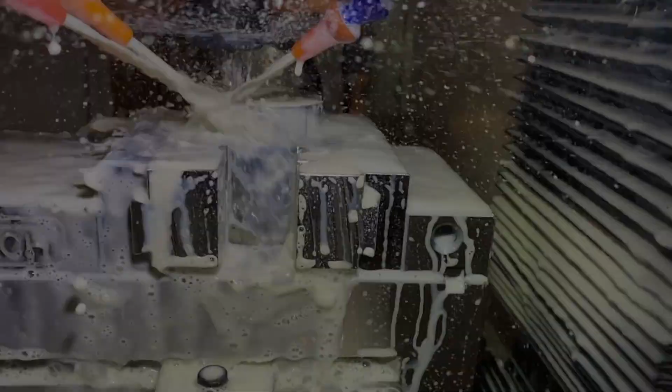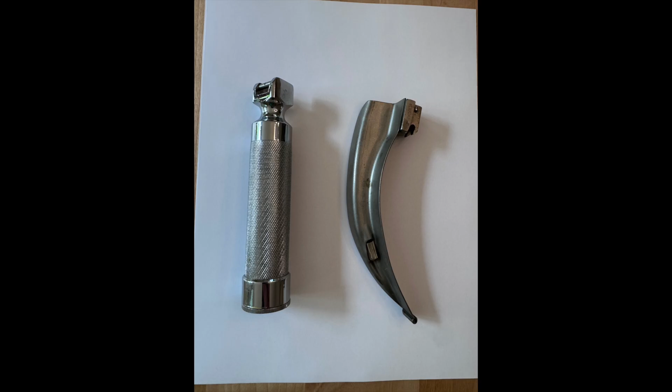Hey, it's MakerDoc here with a quick tutorial on how to make tool trays for all of your medical devices. Now, this isn't the only way to do it, but it's a really simple way. So we're going to make a tray for this laryngoscope handle and Mac 4 blade.

So the first thing we need to do right here is get the special measuring device that we scan it with, which is a piece of paper. Depending where you are on the planet, you can use US letter or A4 paper. And the reason we use that is twofold. One, white background makes shadows stand out really nicely. And two, lets us have an exact size background that the tool can use to trace.

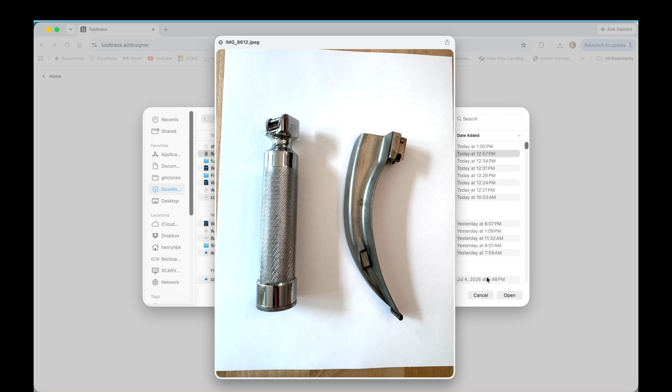So after we've taken a photo, I'd suggest you get it as perfectly up and down as possible. You can be a little skewed as you see here. You're going to go to tooltrace.ai, and it's going to take your photo, it's going to trace it, and then on the left here, you're going to select your options, so millimeters or inches, and how much of an outline you want, like an offset.

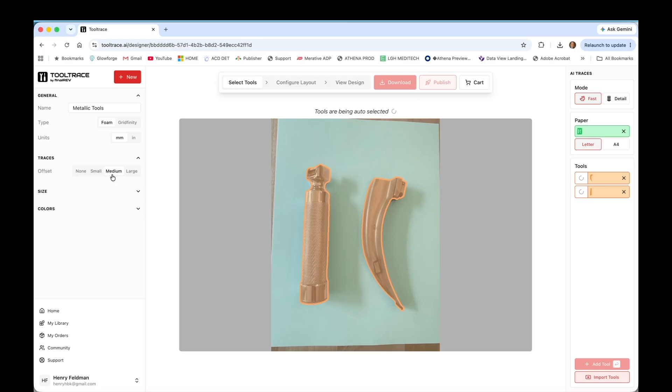And this matters if you're printing it in hard plastic or something like TPU foam. And then how deep you want this. Obviously for things like hemostats, you only want this a few millimeters deep. You don't want your hemostat down in a hole. A laryngoscope's a pretty thick object, so I left it at the default of 20 millimeters.

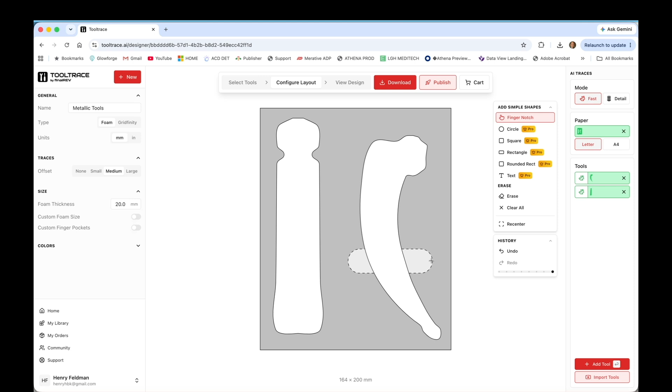Now you're going to see your design that it's traced out for you, and you probably want to add some finger holes, which luckily there's a built-in tool to do. And you can see what happens when you do that. I'm going to add one for both the handle and the blade. When you're all set for how you like it, you can view the design in 3D and you can get a good sense of what it is.

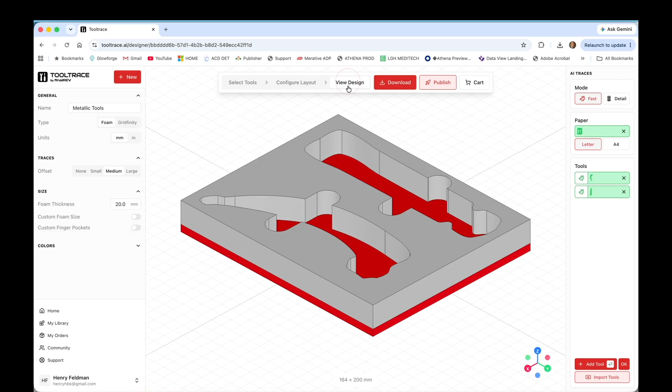But we're not done yet because that's just a foam insert. Or it doesn't have to be foam, but essentially that's what it's making. So now we're going to make a case using this. So let's hop over to CAD, and we're going to export it in what's called STEP format, which is the sort of universal CAD interchange, and pretty much any serious CAD program knows how to use this.

A few moments later. Okay, so here we have the model we just generated in CAD. And there are a few mods I want to quickly make. You'll notice it's actually two parts, and that's because we selected foam, which is called Kaizen foam, which is a two color foam. And the idea is that your tools obviously show in color. And you can print this way, right? So if you wanted to print the bottom in red PLA and the top in blue PLA, that works fine.

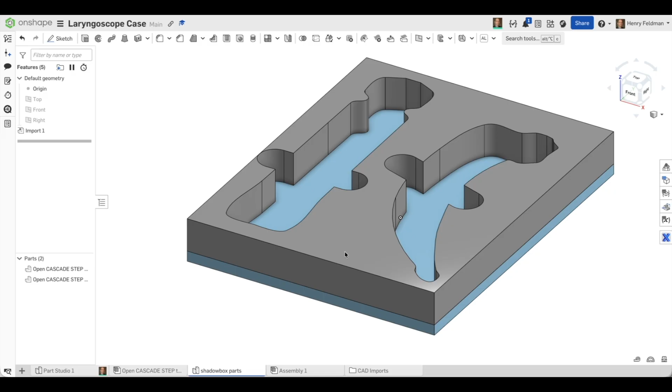The colors here are just the default colors in Onshape CAD, which the first object is blue, the second one is gray. You can set them to whatever you want. Anyway, so the first thing I always do, so a hard edge like this, even if we're making this in foam, has a tendency to tear. And if we were doing this in metal, for instance, that would have a high risk of chipping and obviously cutting things. So generally you want to put some sort of smooth edge, and you can do either fillet, which is a rounded edge, or chamfer, which is a 45 degree. We're just going to do chamfer because it's quick.

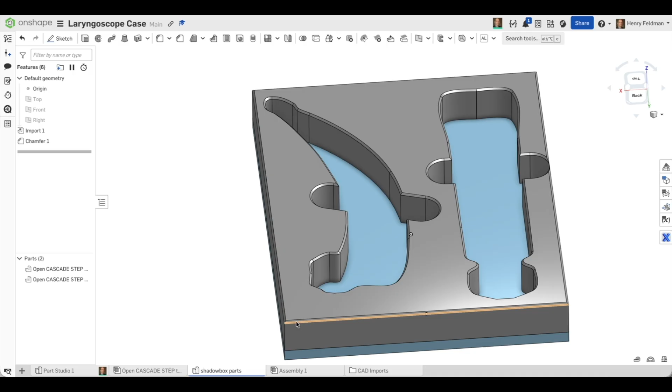So you can individually click on all of these outlines, or you can cheat and say, you know what, I'm just going to do the whole box. So if I do that and we say chamfer, we'll do a 1 millimeter chamfer. Fine. Now the edge is broken. Now you notice it did actually do the edge, but whatever. You can remove that later if you really desire. Anyway, you'll notice that's got a nice little broken edge so that when we print this, it won't be sharp, and the tools will slide in and out easier.

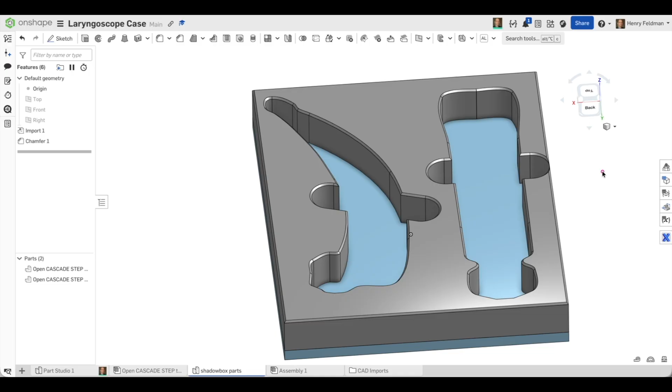So we can see that we have a rectangular box, we have sharp edges, and this is what I was talking about. If we print this, you're not going to want to touch that in the OR. Those corners would be absolutely sharp, even with this little chamfer on the edge.

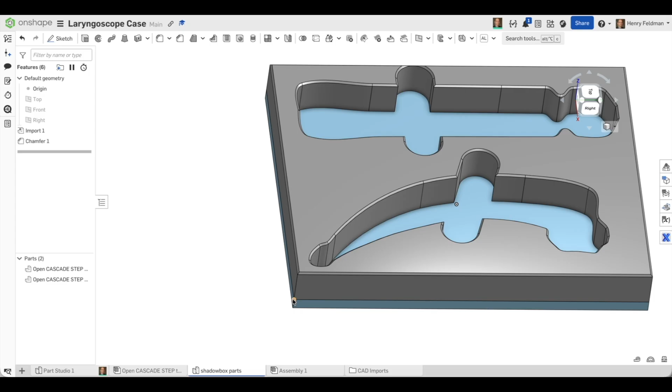So if you were just going to print this as is, I would suggest you chamfer or fillet those edges just to make them less dangerous. But I want to make a case around this. So the cool thing is, one of the things you quickly learn in CAD is, unlike what your mother told you, you need to draw on the walls. So we're going to draw on this surface, and we're going to make a sketch, and we're just going to make a box. And so we're going to put a thing around this.

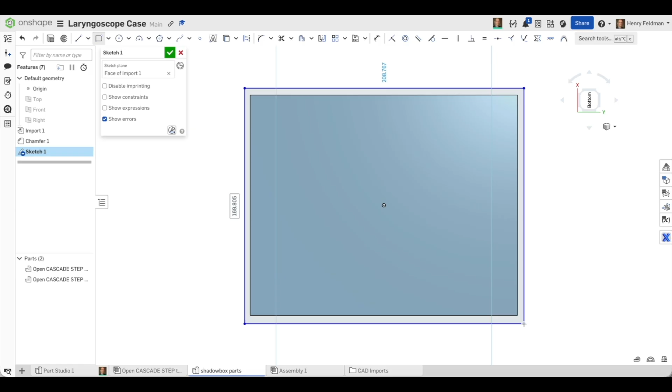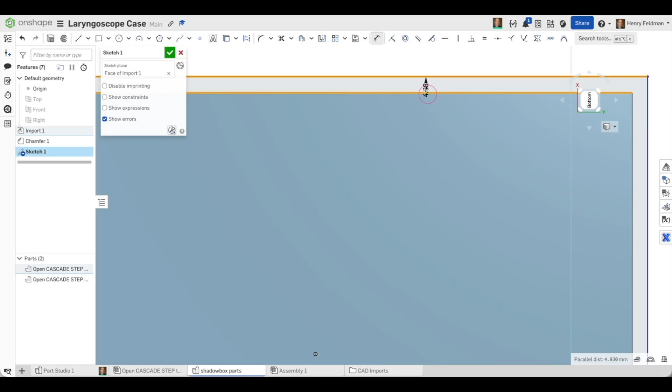And one of the other things that takes a while to get used to in CAD is, in life, constraints generally feel, well, constraining. But in CAD, they're your biggest friend. And so what we want to do is we want to basically outline this box. Now, there are a million ways to do stuff in CAD. I could have actually told it to outline, but for simplicity's sake, let's just put a measurement constraint and say, you know what? That always has to be 5 millimeters from that. And this has to be 5 millimeters from that.

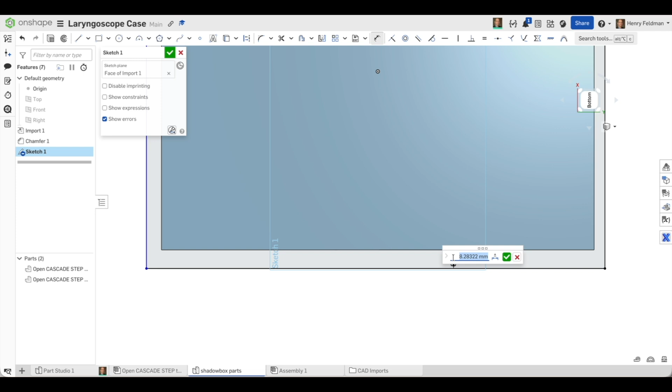And this is Onshape CAD, but pretty much any CAD. So if you use Fusion or Rhino or anything, SolidWorks, they all work the same basic way. I mean, they all have different buttons. They might call something slightly different, but they all pretty much work the same way.

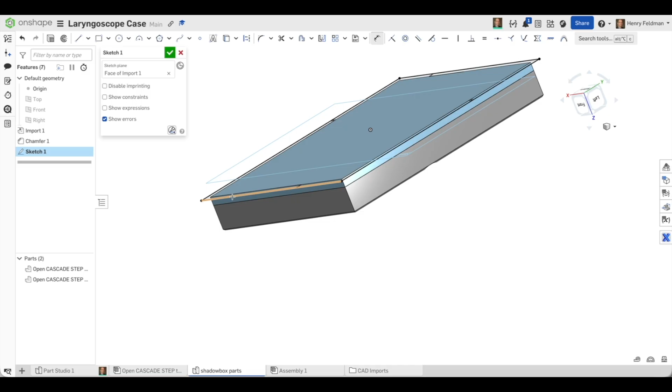Okay, so now we have this outline that we're going to extrude to make our case outside. Now we actually need to extrude in two directions because we want a bottom below this insert that, let's say, we will print in foam. And then the outside, we're going to make the walls. So again, like everything in CAD, there's like 27 ways to do this, but I'm going to do this the simplest way so you all can see how to do this.

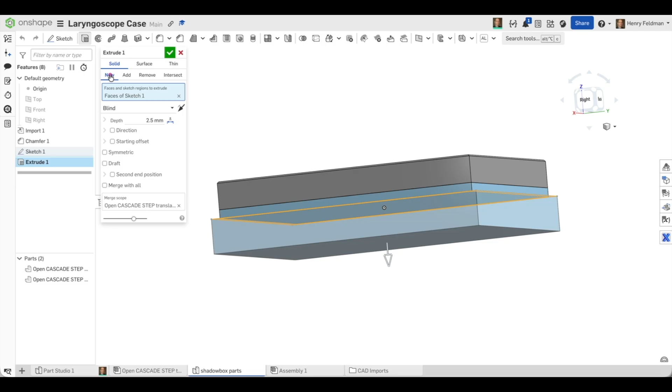So let's take that, and we'll do a 5 millimeter bottom, which is excessive, but you know what? Let's make it 2.5 millimeters down, and we'll say this is a new object. And I'll explain why we want a new object in the meantime. So you'll notice that's the entire base. And then we want to extrude again. We need our thing back. And we want to go the other way. We want to add this to the bottom.

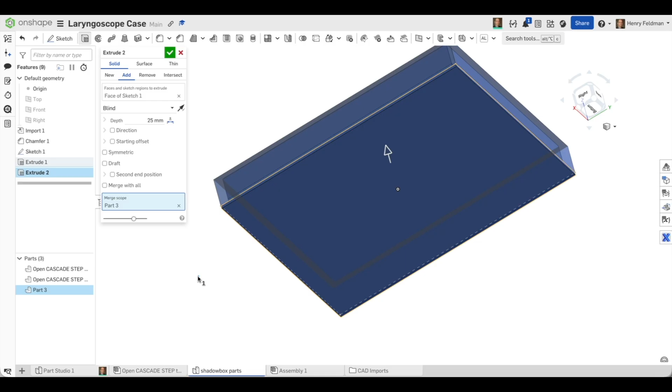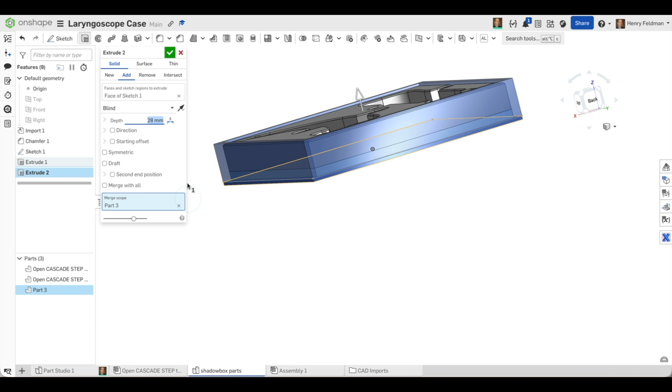And we need to actually make it more than 25. So again, you could say, well, you know what? I'd like this always to be 5 millimeters taller than this thing. But we're just going to say, you know what? We're going to make it 28. Right? All right. So it's a little taller than the top. You know what? Let's make it 30. Okay. So now we have a lip.

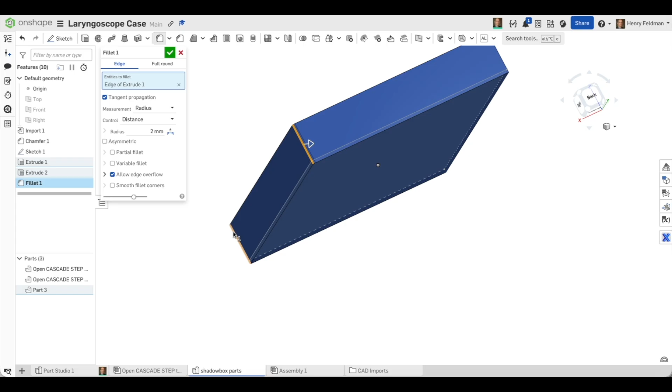And the other thing we want to do, and again, we could have done this before extruding the case. We could have said, hey, make the edges round. So instead of extruding a square rectangle or a 90-degree rectangle, we could have made the edges round. For reasons that I have never been able to find out, the preferred way in CAD is to always do it on the 3D model.

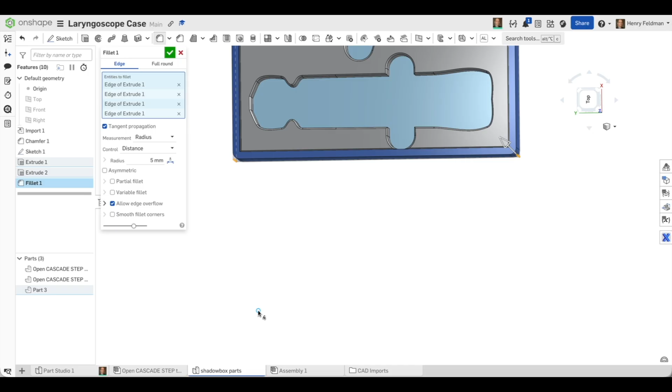There's some performance problem, and this is true in Onshape, in SolidWorks, in Fusion. I don't know why, but all of them, if you use a sketch fillet on many edges, I mean, in this case, it would have been 4. It's not a lot of extruding. That can actually cause problems in CAD. I don't understand it. It, to me, seems like the same thing, but whatever. So now you can see we have a tray with a foam insert.

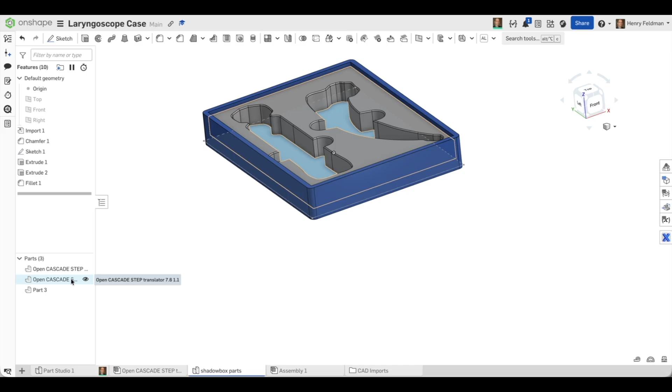Now we can put a lid on this, and in fact, maybe we will. But let's just start with this object, right? So this is 3 parts. We have these 2, and I'm going to leave these as 2 separate objects so we can, in fact, print it in different colors if we want. You could, in fact, take out the bottom part and just print this directly as a foam insert in the case. That would not be wrong.

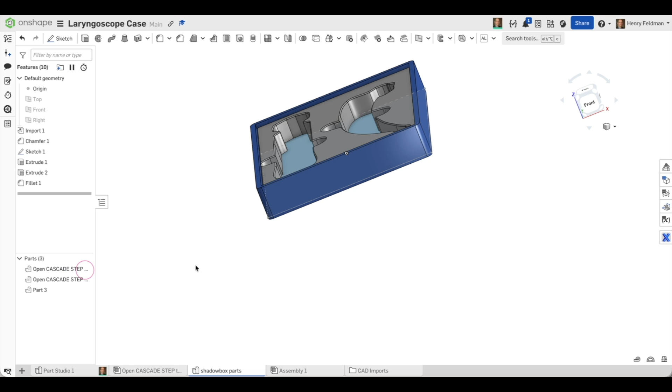Now you'll notice this is floating in air because even though we've made this object invisible, it's still there. But I kind of like the idea of having that as 2 colors. That's kind of cool. Now I only have 1 color of printable foam. It only comes in black, but we could do something.

So one of the things you learn when you're doing this stuff a lot is name your objects. In fact, I will put a plug in right now. Name all your operations. Again, this is such a simplistic part that you don't really need to. But when this is on the printer, it's going to be a lot easier to remember. This is the tray. This is the top. This is the bottom foam.

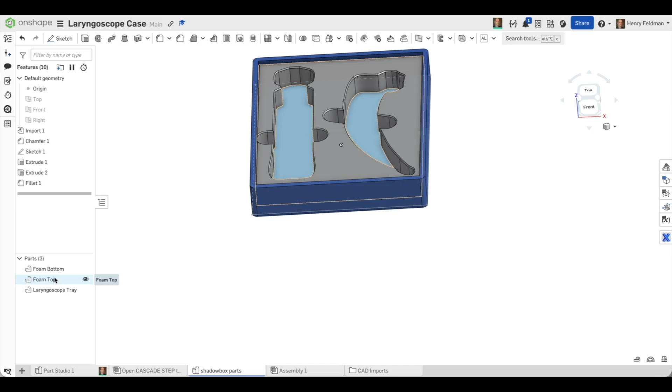And we could, for simplicity, take these two foam objects and not leave them separate. The printer doesn't care. If we tell the printer to print this on top of that and don't switch materials, it'll print it as a single object. But let's start with the tray first.

So if we export this, and generally, if I'm printing, I use 3MF. Just remember the STL format dates from 1984. It doesn't even include units. So by default, everybody prints in millimeters, but in fact, it is an unscaled kind of terrible format. I mean, in 1984, it was pretty amazing. I first used it in 1992, but we've come a long way. 3MF is really the modern printing format.

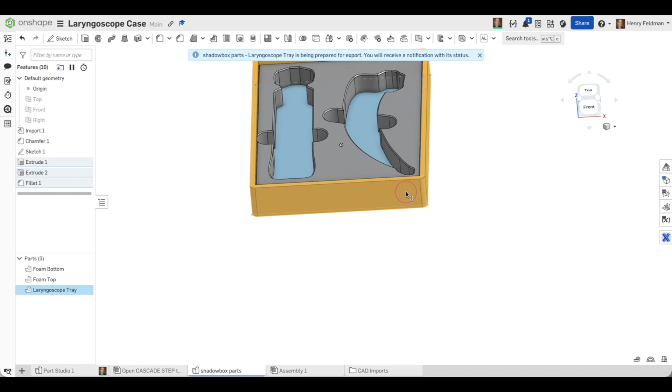Now, in fact, PrusaSlicer, which I'm going to print this on a Prusa printer, can print in STEP file format also, which is the CAD format directly, but let's just be simple and do a 3MF file. Okay, so if we switch over to PrusaSlicer here, and you can see that. Let me just make the window a little smaller so it fits on screen. There we go. And yes, thank you for the tool tip of the day.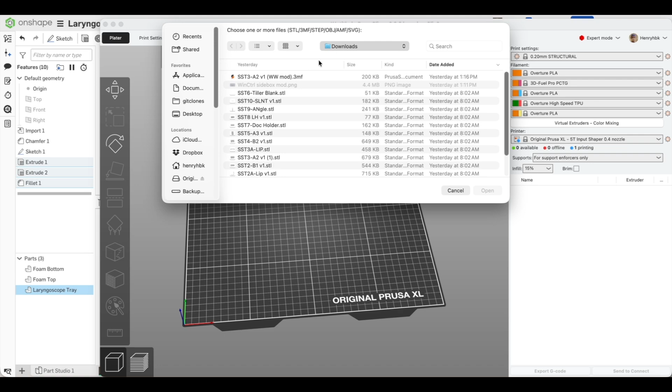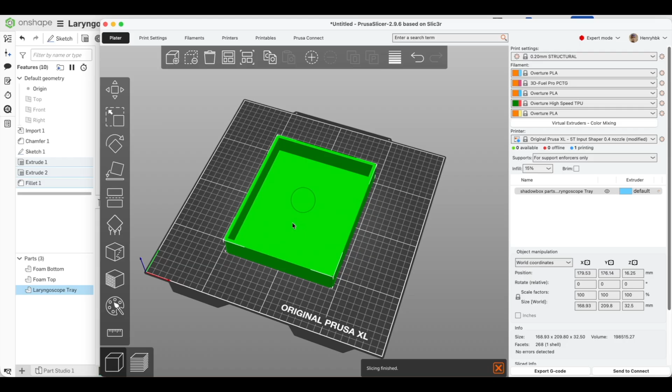We're going to add from my downloads folder. There we go. Okay. And there it is. Not the most exciting part in the world. We'll just print this in PLA. There's no reason to get super fancy. In fact, just for my memory, that is a blue PLA, Airbus blue, because I'm printing a part from my flight simulator. But there we go.

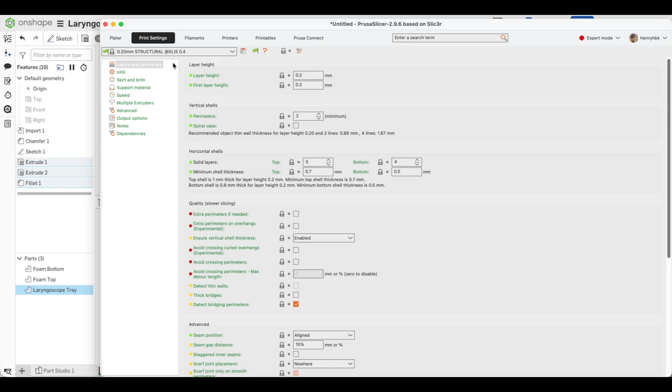So it's gonna take 5 hours to print that at whatever I'm set to. I should probably do some settings, but I'm not gonna bother to go into great detail about how to do 3D printing. What do we got? Oh, layer height. Yeah, that's fine. And this is a 5 tool printer, so you'll notice I have 5 different materials in the printer.

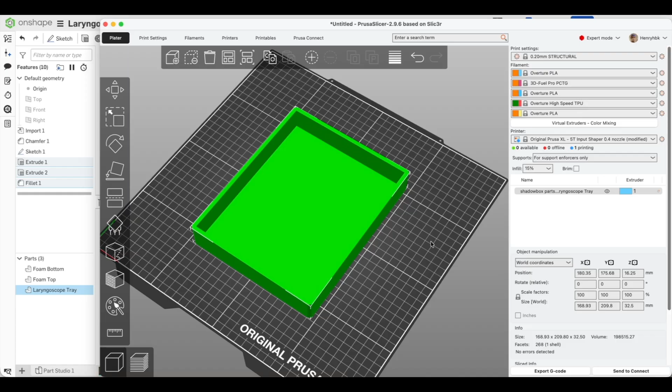Obviously that is not what everybody has, but we're only printing this in one color, so none of the multicolor stuff's really working. I will set this to print in 1. There we go. So that will now print in PLA off my first extruder, and we'll see it after it's done. 1 hour later. For the insert, we're going to use Siraya Tech's variable density TPU foam.

In this case, we're going to use PEBA 95A. What's neat is depending what temperature we print this at and what infill percentage we use, we can pretty much set the density and the squishiness of the foam. And in this case, we'll print it at 270 degrees C. Otherwise, it prints pretty much like any other TPU, except that when it comes out through the nozzle, the additives produce gas bubbles, so it turns into foam.

This specific one, PEBA, has nylon in it to be more bouncy. You can decide if you want it more or less bouncy by choosing one of the other foaming agents. All right, printing is done, so let's take a look at what we did. So here we have our case. The walls are probably overly thick at 5 millimeters, but durability is never a bad thing. We put the rounded corners on the outside, and there we go.

I did end up making a lid because you can. So basically all I did was I took this profile here, extruded that plus the inside, so that made the actual lid part, and then just took the inside and extruded it a couple millimeters more, put a little chamfer on it so it slides in nice, and then just for that little added pizzazz, I UV printed using the photo we took in Tooltrace on the lid, and then just put some AI styled text on top.